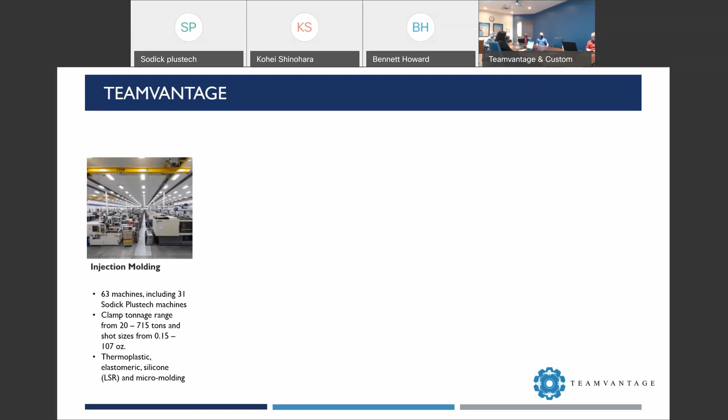A little bit more in depth about injection molding here at Teamvantage. We've got 63 machines, about half of them right now are Sodick Plustech machines. We've got clamp tonnages from 20 to 715 U.S. tons and shot sizes from 0.15 ounce to 107 ounce. We're working with thermoplastic, elastomers, silicone, and micro molding.

We also do a lot of value-added work, so many of the parts that we produce, we've got something else that we're doing to that part beyond molding it. We're doing all different types of secondary operations. We've got 4 clean rooms - a couple of them are set up for molding, and a couple of them are set up for assembly operations.

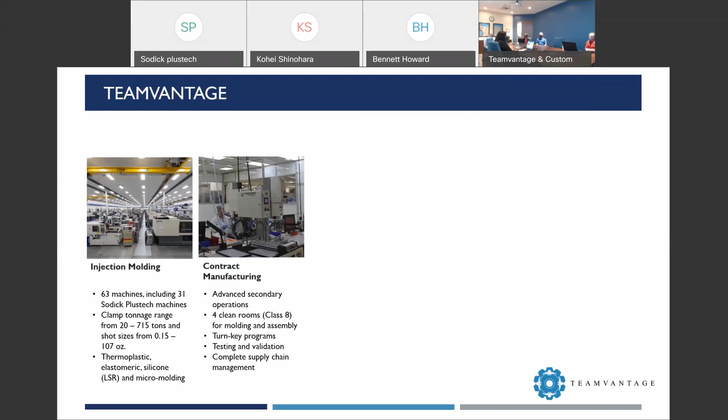We do a lot of turnkey programs where we're not just molding components. We're helping with the part design, building the tooling, molding the parts, doing the assembly, secondary operations, those types of things. A lot of testing and validation activities are involved, and in some cases we're handling the complete supply chain management, including shipping products to the end users.

Very heavy on the engineering services side. We have a very long history with molds. The business has been heavily run by mold makers - I've been a mold maker many years ago, so that's kind of in our DNA. So the tool design and fabrication piece, making sure that we've got good tools to make good parts.

Design for manufacturability support for our customers, helping them with their part designs. They're typically the experts in what their part needs to do - they aren't necessarily experts in how to produce that part or manufacture it. So we work hand in hand with them to come up with a solution that's ideal for all parties.

A lot of validation. Those of you involved in the medical side know how much more work there is today relative to validation activities than there was 5 or 10 years ago. So that's a very big piece of what we're doing, and it can end up to be quite involved - along with the development of processes with new molds, coming up with those production processes and documenting and validating them.

From the quality assurance standpoint, we are ISO 9001:2015 certified. We've got our 13485 certification. For the defense side, we also have AS 9100D certification. We're UL recognized, FDA and ITAR registered for the medical and the defense sides of the business.

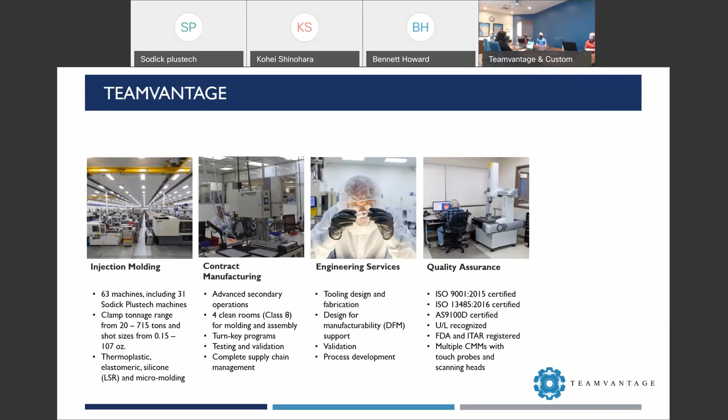Lots of inspection capability - many CMMs with touch probes and scanning heads, vision systems, all the different equipment that's involved in those processes. One thing we do that's a little bit different from some molders is we do get involved in what we call technology transfer.

We'll do as much or as little as the customer is looking to have done. So in some cases, the customer would like to do some injection molding in line with some other processes. We're willing to work with them, get involved in the DFM, the design assistance work, design tools, specify equipment, purchase that equipment, build a work cell, get that all up and running, get it validated, train people.

We've got equipment running around the world where we've trained people that never saw a molding machine before to run a process - Saudi Arabia is one example, several of them here in the United States. We'll then end up working with them to teach them how to run and maintain that equipment and that tooling, and then transfer that to their facility where they can put it in line with some other processes that they might have.

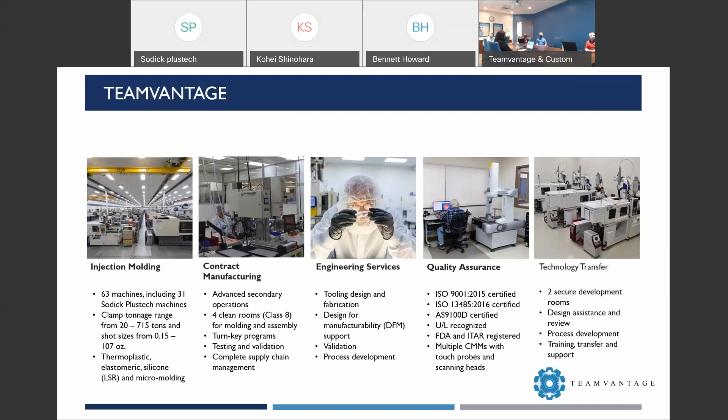At Custom Mold and Design, as I said, that's just across town from us here, so we're located very close, which makes it very convenient for our customers.

We're working on building very high precision tooling: thermoplastic and elastomeric, metal injection tools, silicone tools, multi-component molds, insert molding, all types of tooling. I think the one thing we really have in common is that the bulk of the business we see involves situations where very tight tolerances are required for tight shutoff. So we see a lot of metal injection mold work and LSR work because of our ability to create tight shutoffs. We also get involved with people that want 32 or 64 cavities, very tightly toleranced parts, where validation of that tool is very difficult if there's variation from cavity to cavity.

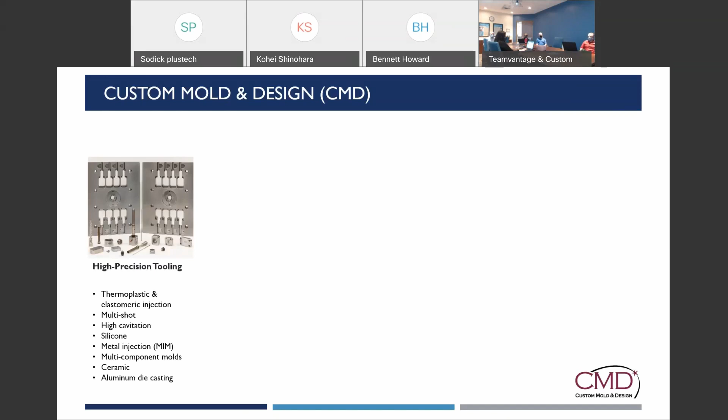So people enjoy working with us because of the precision capabilities we have with the equipment and processes we have in place. We also produce precision machine components. We've got what I'd consider the best equipment in the world for that type of work, so we use it for building our mold components and also for precision machine components.

A lot of that involves multi-axis CNC machining, 3 or 5 axis work, mill turn equipment. We've got CNC Swiss screw machines, EDM wire and sinker. We do a lot of development work on new programs and new processes. Typically we're looking at medium to high volume production, although we do some low volume tooling for specific situations.

On the design and engineering side, we do a lot of work on mold design, also working on the part side, looking for design for manufacturability, and simulation.

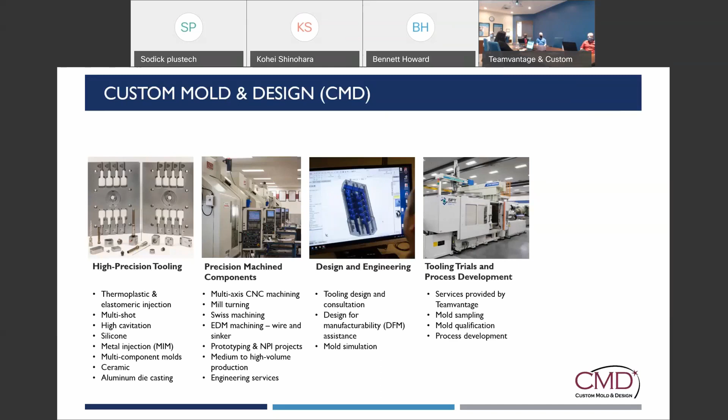Through working closely together between Custom Mold and Design, Teamvantage, and our customers, we'll conduct tool trials and process development activities here at Teamvantage. We'll do mold sampling, mold qualification, and process development. We are a very transparent company, so we work with our customers—process engineers or engineering people from our customers will come out and participate in those activities. They're welcome to be at the press side as we develop processes for their parts and actually participate.

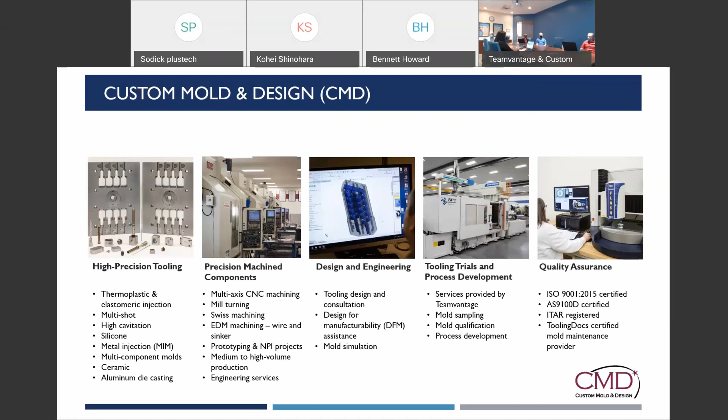From the quality assurance side at Custom Mold, we are ISO 9001:2015 certified. We are also AS9100D certified, ITAR registered, and we've been a certified mold maintenance provider through the ToolingDocs program for precision components.

Paradigme Engineering, the facility out in Becker, we're doing their tool design and fabrication, building tools again for thermoplastic, elastomeric molding, multi-cavity, multi-shot, micro-molding, silicone, MIM tools—kind of the whole gamut. Same kinds of activities going on there from a design and engineering standpoint to support the customer's needs.

And then again, we're doing tool trials for Paradigme here at Teamvantage for the customers interested in that type of service.

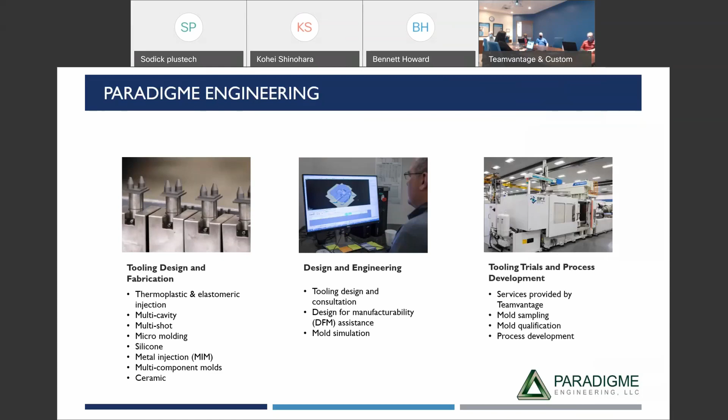So some of what we think makes us unique—number one is the people we have working in these organizations. We're incredibly fortunate to have the skilled people on the team, and it really is a team of people that makes things happen. We've got 235 people at Teamvantage, about 85 at Custom Mold and Design, and 13 to 15 at Paradigme.

I think the culture here is really built around collaboration and working together. We'd like to carry that to our customers and really collaborate and work on projects together, solve problems together. There's so much more to be learned—if we got everybody around the table working on solving problems, we'll get to that solution a lot faster by having everybody involved.

And I think that's a piece of what we enjoy from the process, the relationships we build with our customers. People will talk later a bit about the relationship between Sodick PlusTech and Teamvantage—similar kind of situation. We really enjoy that kind of work.

We've been fortunate enough to invest in the best facilities and equipment you can buy, as we would recommend. The Sodick equipment is one example of that. Top of the line equipment helps us do the most difficult work that we can find. We've got superior engineering support—we've made a big investment on the engineering side to make sure we've got people capable of helping our customers with the most difficult problems.

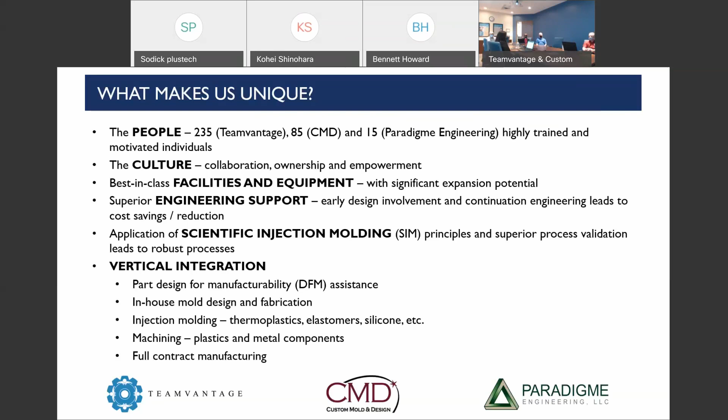We routinely apply scientific injection molding principles to build more robust processes for our customers. Then the vertical integration allows us to get involved in a lot of things because we can control the tool build, having that in-house, if you will. In many cases we're doing insert molding with components produced at Custom Mold and Design. It just gives us a lot more capabilities and a lot more control over the processes we use to support our customers.

Part of what I wanted to talk about was just our history working with Sodick. I met Kohei quite some time ago and have had a very good relationship with him. I consider him a very good friend and we've worked hard together. I think that's a piece of what makes business successful and fun, building those relationships and seeing what we can do to help each other. In many circumstances there's a supplier-customer relationship, but I think we've been able to break out past that and just be good friends.

There's been many things Sodick has done to help Teamvantage advance our game and become a stronger supplier, and a lot of things we've done to help Sodick PlusTech from their early years. The first Sodick PlusTech machine we bought was a 2002 TR20EH.

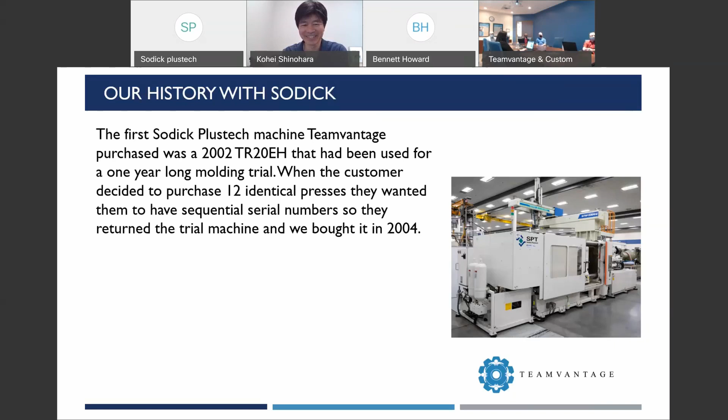It had been sent out to a potential customer for a trial. They ran the machine for a year to prove it could do what Kohei was trying to tell them it could do. When they decided to buy 12 identical presses, they wanted sequential serial numbers, so they gave that trial machine back to Sodick. Because it had depreciated some, in those days it was at a price we felt we could take a risk on. So we bought the machine in 2004, brought it in, put it on our floor, and put it to work.

The experience we had with that machine, we were very impressed with it. We had been impressed looking at them before, but having the machine here and living with it really made us happy with what we saw, and we now have 31 machines, as I mentioned earlier.

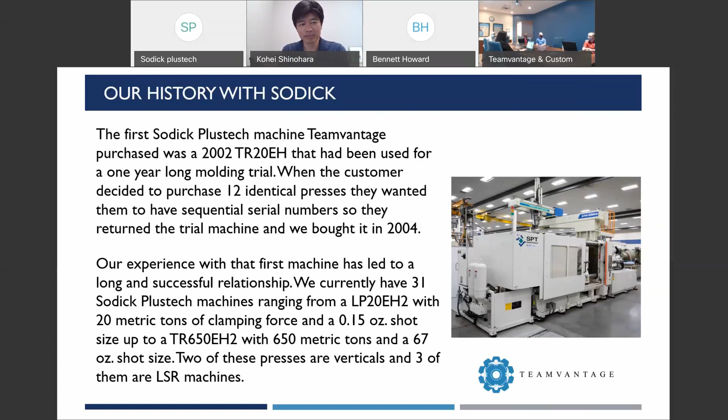So we've got an LP20EH2 with a 0.15 ounce shot size, and we also have a TR650EH2 with a 67 ounce shot size. So we've got quite a range of machines. Two of the machines are verticals and three of the machines are LSR machines. So we've got quite a range there, and obviously we've been very happy with the equipment and continue to invest in it.

With them making up 50% of the presses we own, the things we like about them is that I think the machines are built very well. They're very robust. If you look at the guts of what builds that machine, it's all good quality components and parts, very well built. We find that shot size consistency, and the pressure and speed available, make a huge difference. We like to take on challenging parts, some higher temperature materials, thin wall sections, extremely small parts, those types of things, and the Sodicks we look at as a real advantage in producing those types of challenging parts.

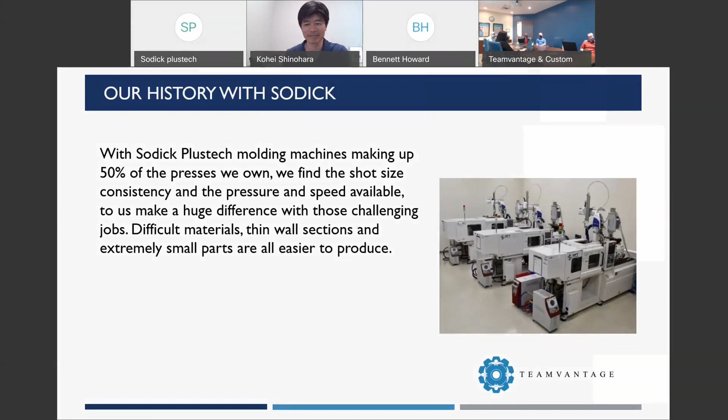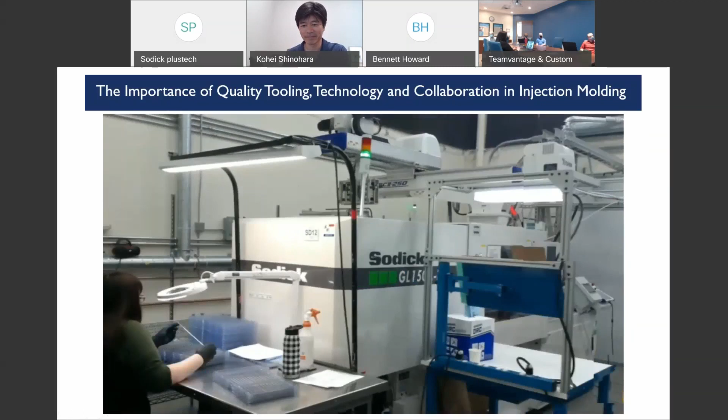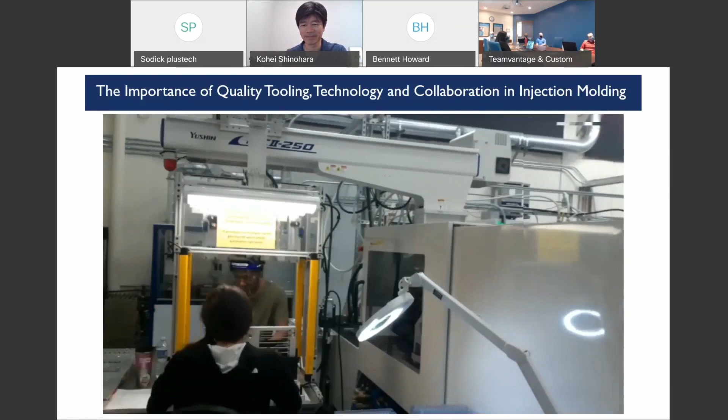So I think this is a little bit of a video just to show you what's going on. We've got a couple of presses in an LSR molding operation where we're insert molding some blades. Just a quick view showing the operators loading blades into a carrier that's then transported to the molding machine, where we're over molding some LSR material.

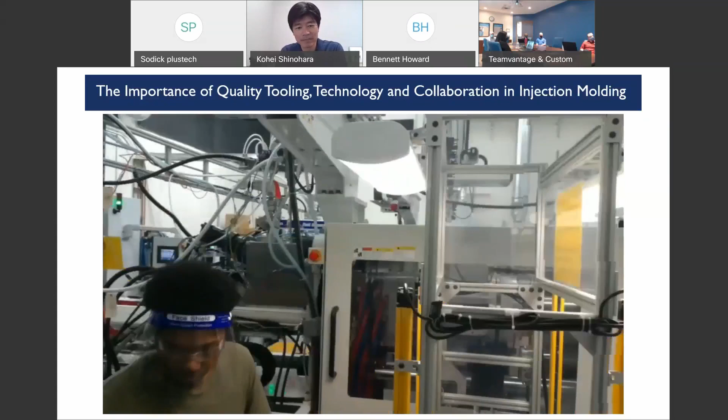These are two 150-ton LSR machines from Sodick.

Next, I thought we'd bring Kohei in here to chat a little bit about the history that we've had together.

Yes, thank you very much for the introduction of the history between Teamvantage and Sodick. It's been since 2004, and nothing but appreciation for the customer-supplier relationship.

There's a lot of things we can talk about, but as the machine builder, I think Teamvantage takes the biggest advantage of Sodick, because they don't just ask the machine maker for a machine with a spec, they openly share their project and what they want to achieve. They share future functions, so that it's not just about picking the machine size and injection unit size, but we can talk about possible options, possible tricks you can use with our machine functions. The more we know about the customer, the more robust our offer will be throughout, and I think our offer becomes more valuable for the customer. So definitely Teamvantage knows how to use a machine builder.

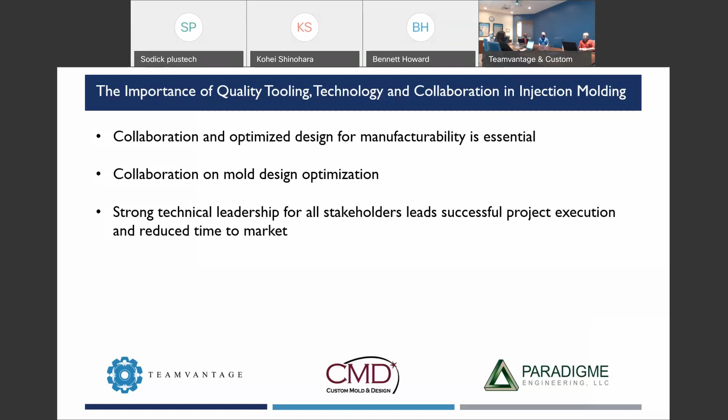Collaboration on the mold design is helpful too, working with that tool shop, making sure we're getting the mold design exactly the way we want it, the most efficient mold we can build. I think strong technical leadership for all stakeholders - the OEM, the people building the tooling, the people handling the molding - making sure everybody's working together and pulling their own weight to bring that idea together, makes for a successful implementation, helps build better parts, reduce time to market, and therefore produce better products.

The work done to manufacture very close tolerance tooling using the best-in-class equipment leads to the best high-quality tooling. There are so many advantages if that mold is very, very precise, and if a significant percentage of the tolerances in the parts is not used up in the construction of the mold, it gives you a tremendous advantage. It gives that molder a lot more opportunity, a lot more room to work within.

There are a lot of times where maybe you can get away with lesser capable tooling, but it creates problems down the road when you're in your second, third, fourth, fifth year of production. It's a real advantage if you can get those cavities as identical as you possibly can, so that you truly have all those tolerances available to the manufacturing folks.

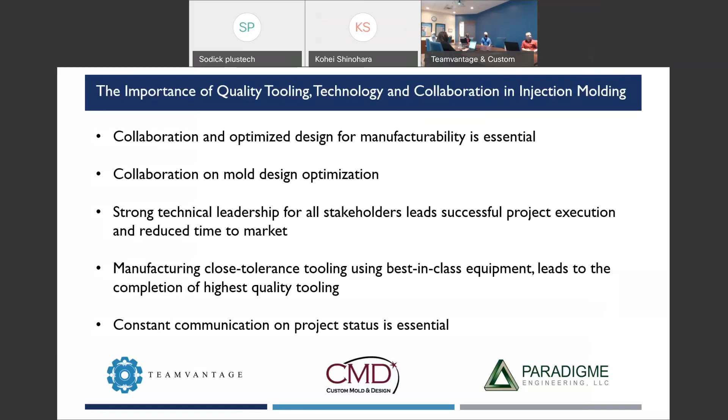I think everybody probably knows this by now, but constant communication, making sure people are talking to each other. In today's world it's especially difficult, and in some ways easier - we can shoot emails around, we can send text messages - but picking up the phone every now and again and just talking to each other helps you land on potential issues and get them out of the way before they become a problem, as opposed to a midnight email that may be taken out of context.

I think our ability to sample the tooling in the Sodick equipment, and the repeatability of that equipment, helps us really demonstrate what the tool is capable of. Having that top-notch equipment is a real advantage.

Using scientific injection molding principles helps really optimize that process development activity, brings continuity and consistency to the activity that's going on, and makes sure that we end up with consistent results.

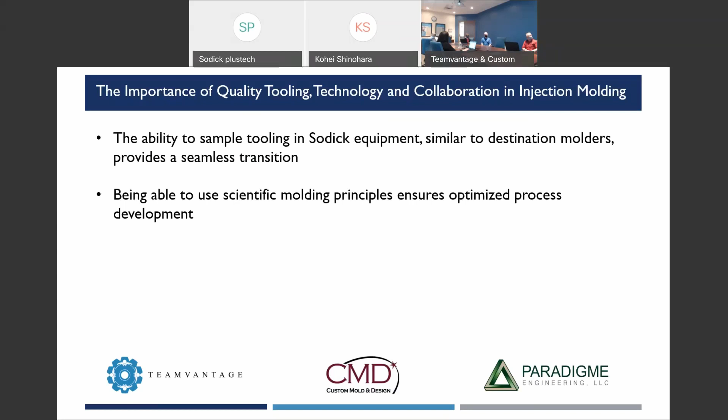We'll hand it over to John Palmquist, our General Manager at Custom Mold and Design. Hello, I'm John Palmquist. I'd like to talk about the importance of having quality designed and built tooling, and its impact on the manufacturing process.

It's a key consideration in the overall process, along with communication from the time the project is quoted. It's key to success. I found that the beginning of the engineering process is really at the quoting stage.

We're often making napkin sketches of the molds, making sure we are quoting what we're really going to produce, because it takes away a lot of the confusion that comes downstream in the design process.

Optimized part model design for manufacturability is essential. A lot of times we're suggesting changes to the parts if possible, draft changes, wall thicknesses, things like that, just making sure we're working with the customers to make sure the part model design is the best it can be.

For manufacturability, working with the customer on mold design optimization is one of the most important stages. The mold design is, we're trying to figure out the best ejection, the best cooling, designing the tool in a way that can be manufactured on the equipment to get the most accurate cavity details.

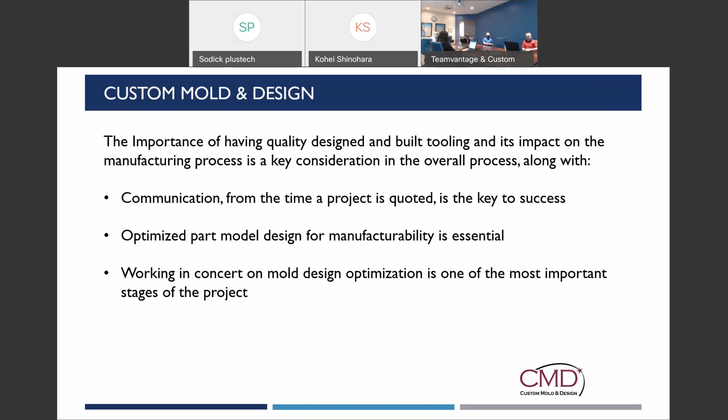And that's really where all the engineering comes to fruition, right up to the time of sign off on the tool design. Then manufacturing close tolerance tooling, using the best in-class equipment along with skilled workers, leads to the completion of high-quality tooling.

I kind of look at this as two stages. You've got to get the engineering part of this right, the tool design, best we can do. And then the second is having the equipment to be able to make sure those cavities are identical to each other and right to spec.

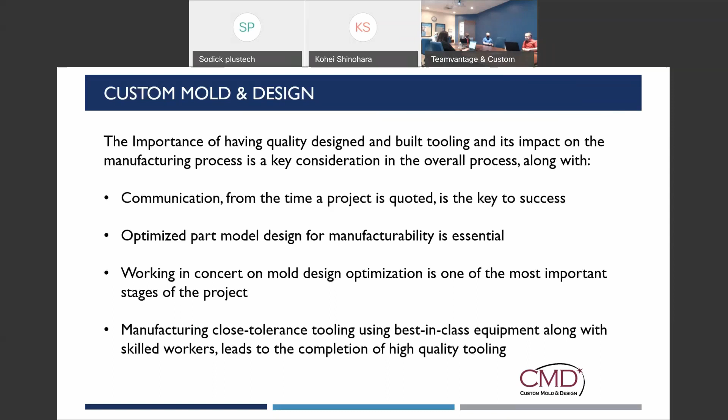So we've got to share a case study with you here. One of our existing customers referred one of their largest customers to Custom Mold and Design because of the quality tooling we've been providing to them.

The OEM needed 9 16-cavity molds related to COVID testing. Previously, they kind of shied away from molds above 8 cavities, and often shied away from anything above 4 cavities because they expected to see too much variation in the cavities.

But with the pandemic, a new solution was required. Typically, our first job is to collaborate with customers to optimize part designs. In this case, however, the OEM had already completed that step. So Custom Mold and Design went into the design process, working with the end customer to come up with optimized mold designs. Once approved, we began fabrication.

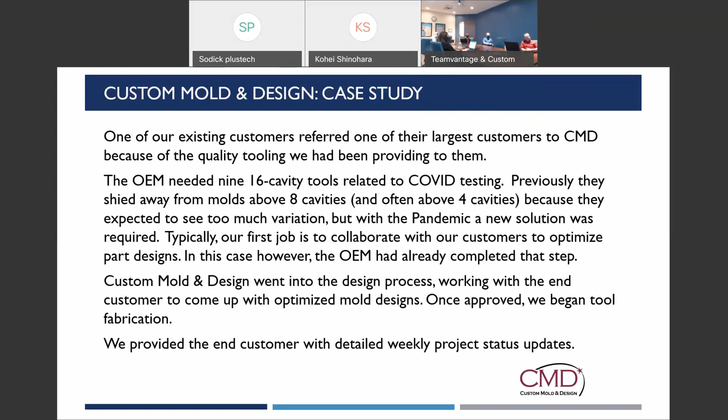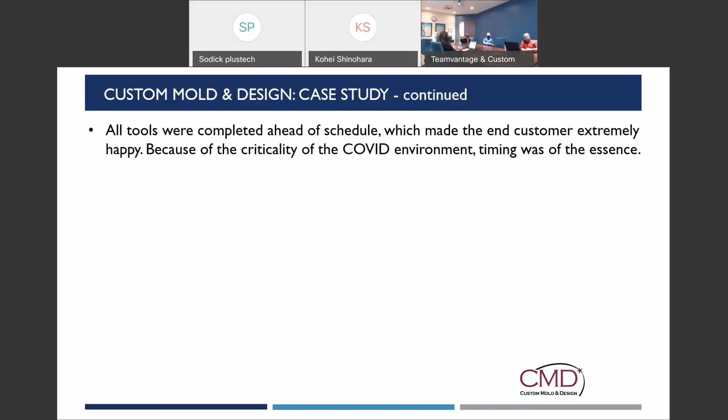Our customer was looking for updates. We provided the end customer with detailed weekly project status updates. All the tools were completed ahead of schedule, which made the end customer extremely happy. Because of the criticality of the COVID environment, timing was of the essence on these being on time.

Upon tool completion, the molds were transferred to our sister company, Teamvantage, where the tools were trialed on Sodick equipment and manufacturing processes were developed. All tools went through a rigorous scientific molding development process.

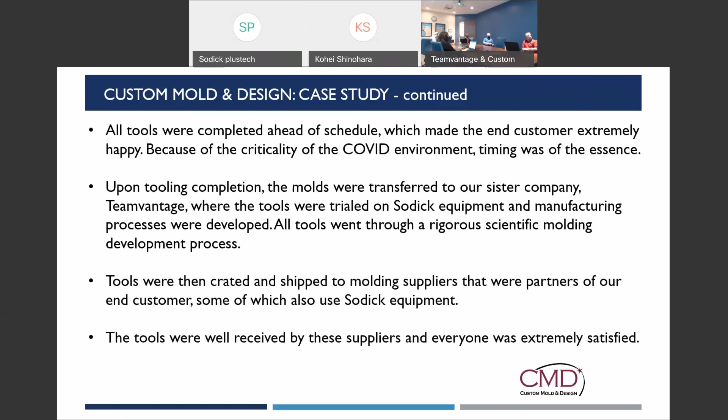Tools were then crated and shipped to the molding suppliers that were partners of our end customer, many of whom had Sodick equipment. The tools were well received by these suppliers, and everyone, to our knowledge, was extremely satisfied.

Our end customer told us that because of the early tooling completions and the quality of the tools we manufactured, it was one of the best overall tooling experiences they had ever had. Because of that experience, we recently received purchase orders for 10 new tools.

And here's a testimony from the customer.

I would like to thank you for all your outstanding contribution to our efforts to increase manufacturing capacity in the battle against the COVID-19 pandemic. You will be pleased to know your work has had a direct, positive impact on our ability to provide our products to a global healthcare community.

Our most critical dimensions were successfully tuned on the first iteration with precise results. This is unprecedented on these precision parts. Several tuning cycles have been required on prior builds by other vendors.

This resulted in considerable schedule savings, as well as contributed to more predictable scheduling of future builds. The interchangeability of the mold parts was another example of our outstanding efforts. The ability to mix and match parts from a variety of different molds allowed us to recover from several errors by molding suppliers that would not have been possible without this level of accuracy and precision. This shortened the time required to recover from these unscheduled setbacks and allowed us to keep this program moving forward. That was from the principal plastics engineer of a molecular diagnostics company.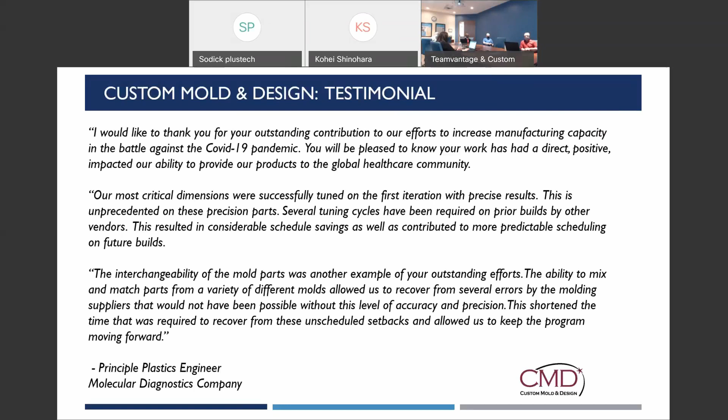As John said, the customer provided a very detailed protocol and listed the studies you see on the screen that they were interested in performing for each of the tools. We collaborated closely with John and his team early on in the project to understand which presses were needed and when, to ensure we had the resources and equipment available to perform the trial.

There's a special controller that was needed, and we did training on that prior to the sampling to make sure when the tools arrived we were ready, and our team was able to perform the trial in the time frame needed for completion.

The customer provided templates that they wanted us to complete to document the study results, and we provided samples to them of all the products before the tools were crated for shipment. In addition, all the process documentation that we developed ourselves was also sent to the customer, so when they started up at their facility it could be a more efficient startup.

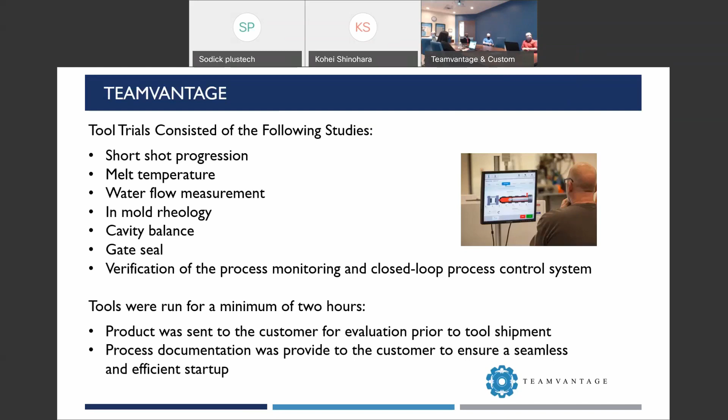As evidenced by this case study, Teamvantage works closely with our sister sites and our customers to provide sampling services. We welcome customer-specific requests such as this and execute requests from anything from just tool function to process development to process capability studies similar to OQs.

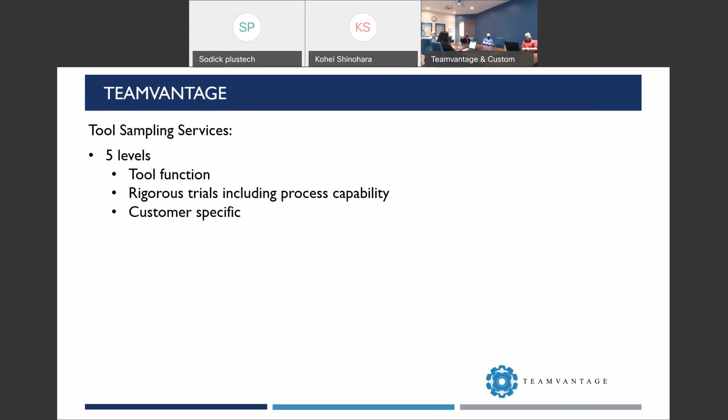Customers are encouraged to be part of the process, as Lester mentioned. We really like them to be firsthand so they can witness how the tool is working and what the product looks like, to see any issues before there are surprises when the tool transfers. We can provide engineering certificates of conformance as an output of these tool sampling processes if needed, to make sure the customer can get their product to market faster or do DV studies or whatever they need to help them get to market as quickly as possible.

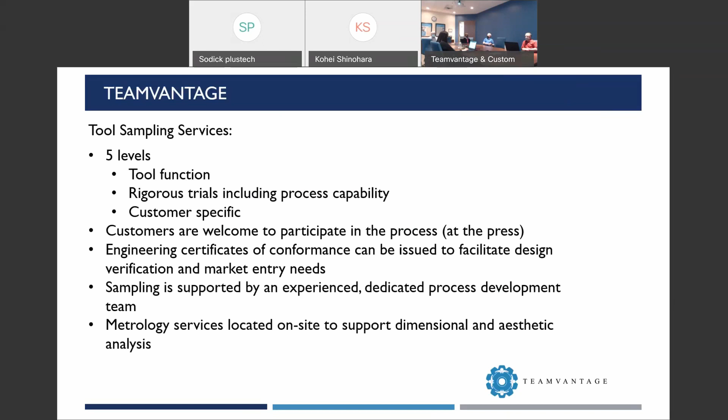Our sampling services are supported by a very experienced team that's fully dedicated to process development. We also have metrology services located on site, and a custom mold and design team to support dimensional and aesthetic analysis. We've got another video here that we'd like to show you.

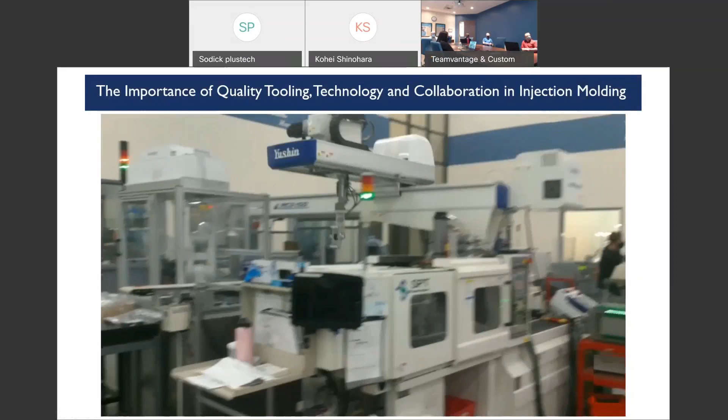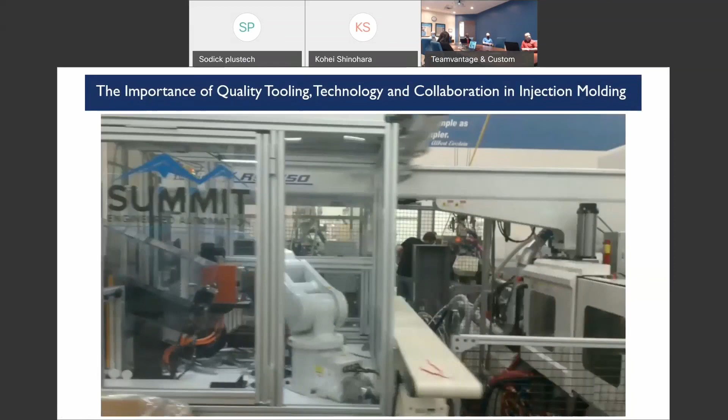It's another great example of the integration of an injection molding machine and automation. As you can see, a molded component is being transferred to an automation cell. There's a carrier that was previously molded, staged in the automation cell and indexed into the machine, where the product being molded is then inserted into the carrier. The particular product being molded has very, very thin wall sections, and we find that the Sodick machine is perfect for this application because of that.

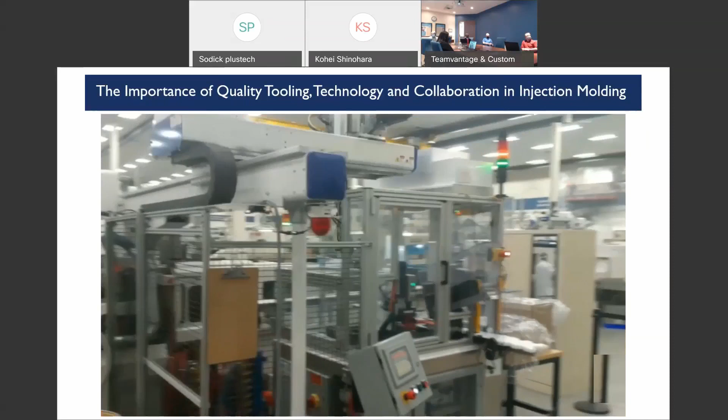There can be no pinholes. This is used for a diagnostic application, so there's actually a leak test performed in the automation cell. If the product fails, there's an offline tester, the red cube you can see there, that we can use to verify that the product integrity is good.

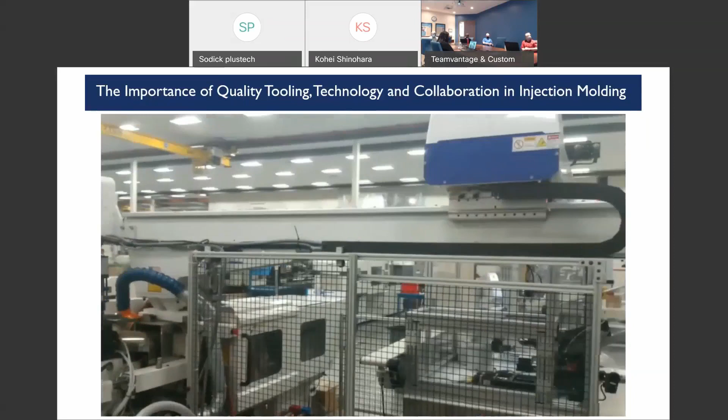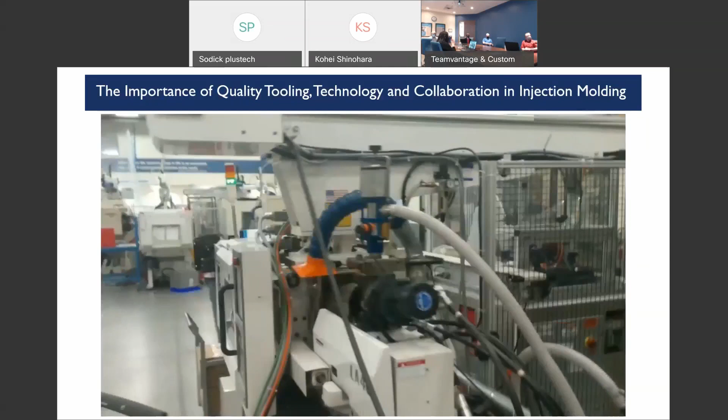The footprint of this automation cell is very small, but very effective. There's easy access to the equipment, either the injection molding machine or the cell, so if we need to get in there to do tool setups, changeovers, or preventive maintenance, we can get to it very easily and safely. This cell is just one of many examples that illustrates how technology can be applied to offer robust, cost-effective solutions to complex product applications.

So our key takeaway is that collaboration and optimized design for manufacturability is essential to be successful. Working together on the mold design, making sure we've got that optimized before we start cutting steel, making sure we've thought through all the various questions and issues.

Strong technical leadership for all stakeholders. We've got to have the right people involved from each team to make sure we execute the project successfully. And if the goal is to reduce time to market, that's the only way we're going to make that happen.

Manufacturing close tolerance tooling using the best-in-class equipment leads to the completion of the highest quality tooling, and that's going to be the way to produce the highest quality parts.

Constant communication on the status of the project is essential. That way people can be prepared. We are all working in the manufacturing world, and things come up, and the more we're talking to each other and working closely together, the quicker we can respond to those eventual issues that show up.

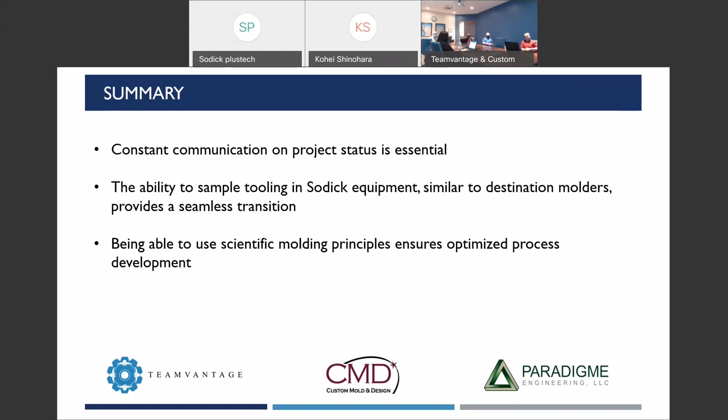I think the ability to sample tooling on Sodick equipment is a real advantage. It really helps provide some rock-solid processes. And then, of course, using scientific molding principles really helps make sure that we've optimized the process development activities.